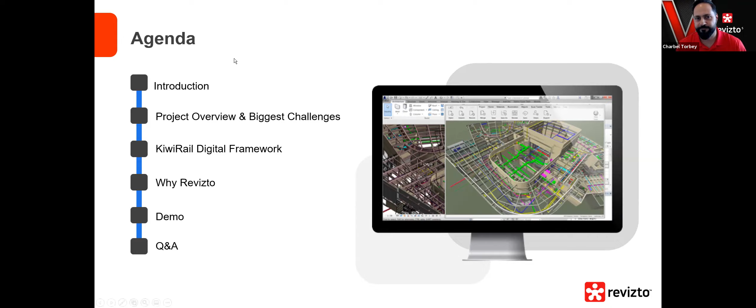I'll just do the obligatory awkward transfer from one slideshow to another, and maybe caveat this that there's probably a number of you working from home at the moment in various degrees of lockdowns and what have you. So it wouldn't be an online presentation unless a toddler or a small child interrupts. So if you just want to place your bets in the chat, Derek's got a toddler that's always keen to help, and I've got a 4-year-old that's pretty intent on chipping in her 2 cents on why we use Revizto. So you can look forward to that later in the proceedings.

So yeah, Charbel mentioned a little bit about KiwiRail. We're New Zealand's rail operator. We have just over 4,000 kilometers of track, and there's a few different parts of our business. So we have a freight business that includes moving freight right through the North and South Islands, and also that connection between the two through our Interislander business, so the 3 ferries that we operate across the Cook Strait. We're responsible for the infrastructure that those services run on, and we have a pretty large property holding as well.

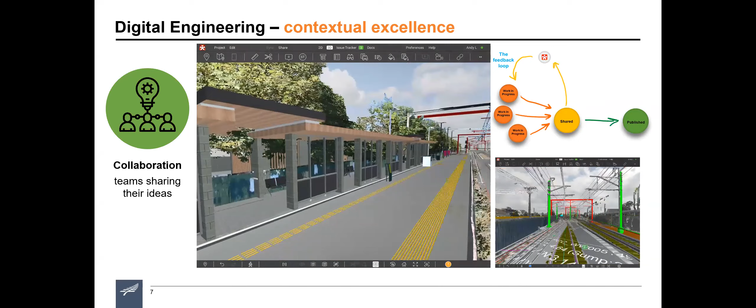So, slide here. One of the big things we see as an opportunity when it comes to the design phase of a lot of these projects is around what was at the top, contextual excellence. I'm sure there's some people on the webinar that have already heard me say this, but it's not uncommon for us to take a look at our codes and standards, or to take the building code. What we really have there is a list of do-minimums, and we quite often articulate what we want in terms of the do-minimum. And so that's what we get. We don't really discern between somebody who's done the minimum and someone who's gone well above and beyond it.

But good isn't just a pass or fail. There's good and there's great. And I think one of the things that can be a real challenge for us is how do we understand, once you've met the minimum requirements, what's better than just doing that?

So the example I give is, come home from school, or would have if we weren't in lockdown, and the kids will go in the front door and they'll dump their bags and jackets and shoes all in the middle of the hallway, which I'm sure you'll be shocked to hear. And obviously my wife and I will politely ask them to put their crap away in their room, and they'll sort of begrudgingly drag it off down the hallway.

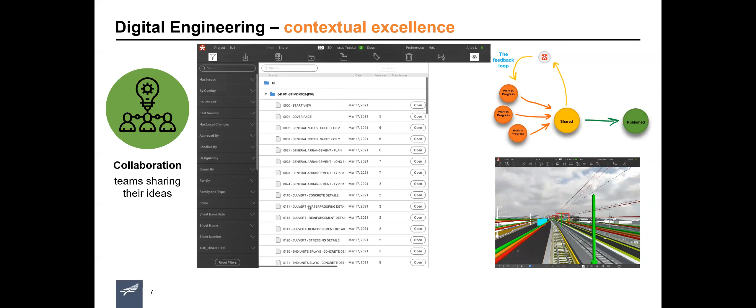And a few moments later you hear a thud, and it'll be our 4-year-old or the dog's tripped over and face planted because there's a large pile of jackets and bags and shoes and things lying just down the other end of the hallway. And so when challenging the 8 and 10-year-olds on why their crap is still lying around in the hallway, it's great when they point out that it's actually just inside the door. So technically it is inside their room, which is what we asked them to do.

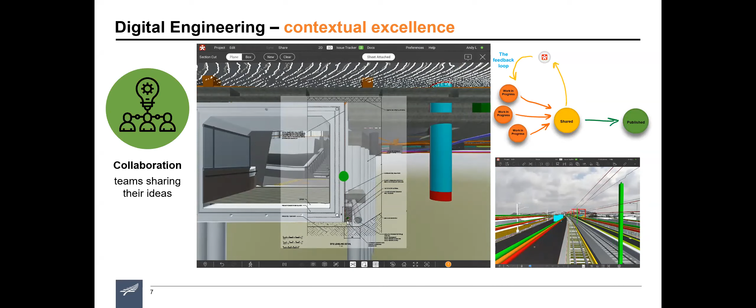They've met the minimum requirements, but I'd say it's far from contextually excellent. Okay, you did what I said, but that wasn't really what I meant, and it's a long way from looking good. So for us, Revizto is one of the tools that we can really use to bring that contextual excellence into the design phase, federating lots of different types of data together.

And yep, we've tried to use things like Navisworks for that previously, but it's unlocking it in a way that's really simple and easy for everybody in the project to use, so that it isn't just the technical people that are authoring the information that are able to access it and consume it. It's everybody on the project, and they can see what it looks like next to everything else that's happening. And that contextual excellence, what's the expression, daylight being the best sanitizer.

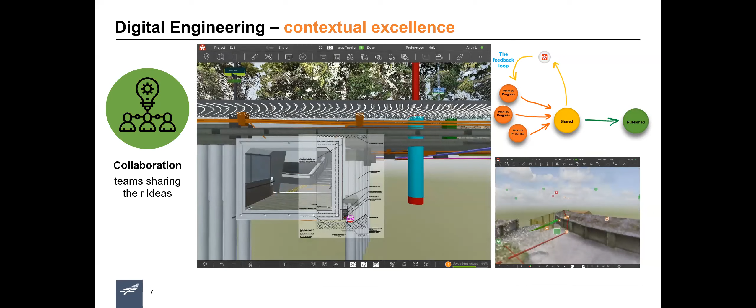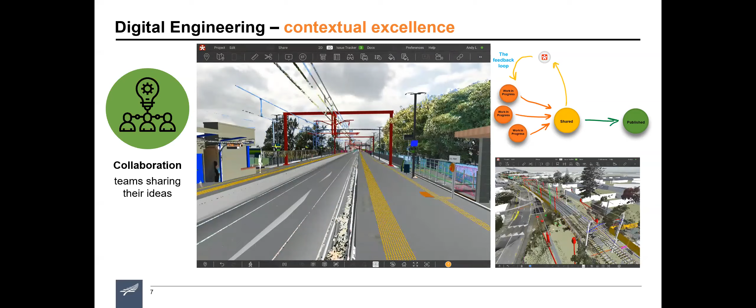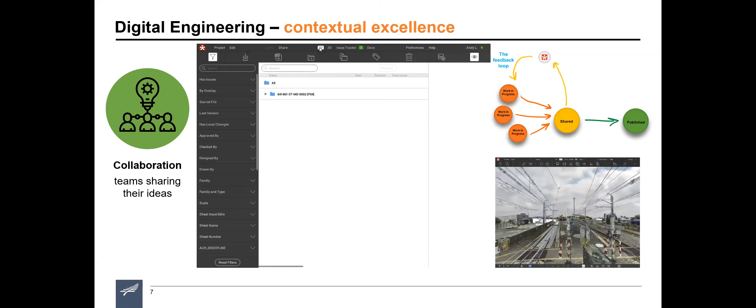Once you see these issues out in the open, people become very aware of them, and they tend to get cleaned up, and they get cleaned up in advance of us getting out to site and discovering those issues. I think that's probably one of the big lessons we learned from our first pilot project, which is actually on the screen at the minute. We didn't have Revizto on that project, and we were using Navisworks to federate everything and work through the coordination and clash piece.

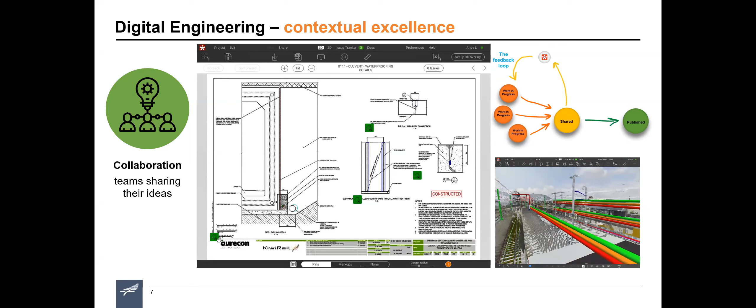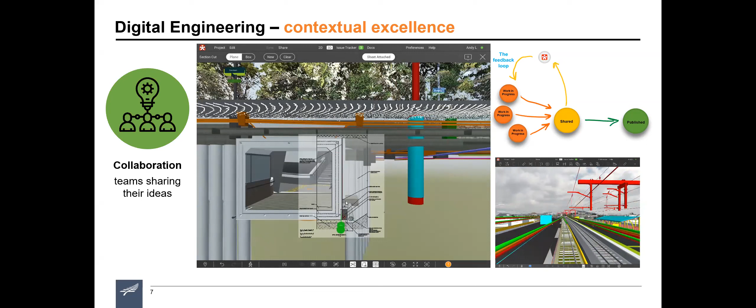But what we weren't doing a very good job of was actually closing issues out as they arose. We just didn't have enough rigor around it. So we were still having instances of getting to site, finding a clash, checking the model, and the clash is in the model. So it was great that the model represented what was happening on site. It was just a bit of a shame that maybe we had left those clashes baked in.

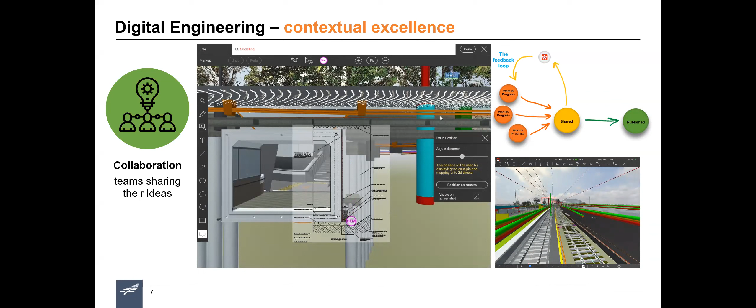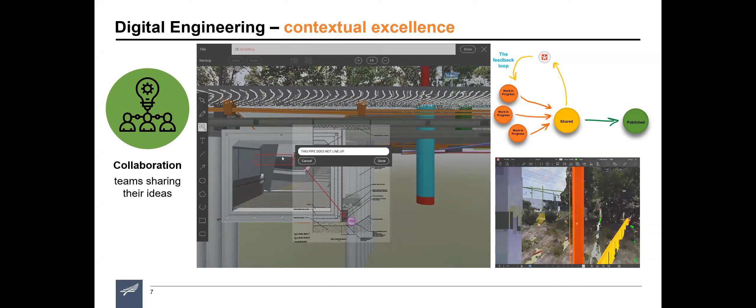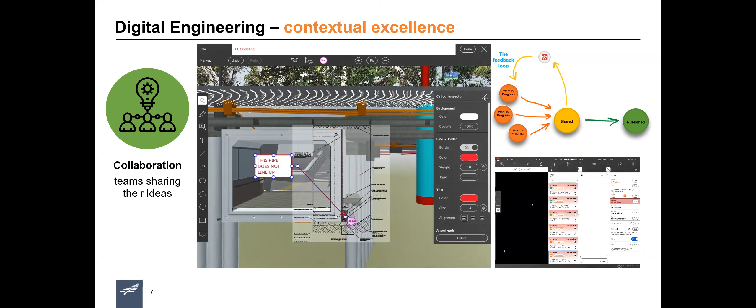And so on our second pilot project, we decided that was something we wanted to address. We wanted a tool that was going to give us a way to raise those issues, but actually track them, close them out, and make sure that we were resolving things before we got to site. I mentioned our CDE. We kind of thought that everything will be in there and everybody will go there to consume it. But actually what's now transpired is Revizto's become the place where people come together to collaborate.

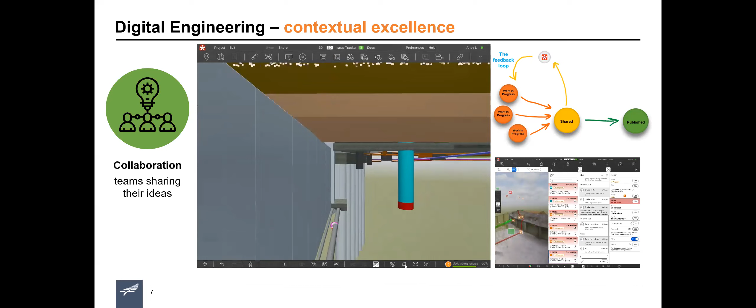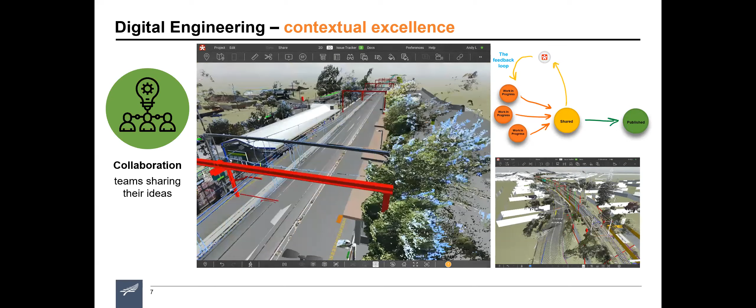The information does live in our common data environment, but ultimately it's a fancy document management system. And it's the power of having all of this information in one place and creating that contextual excellence that everybody in the project team can go to, that really is adding value to our projects.

Awesome, Andy. I had two questions around the same things that you already mentioned. I was going to ask about your strategy in terms of implementing and using Revizto, and I think you mentioned it briefly, but from our previous presentation, I heard you saying before that you provide licenses to everyone on the project. You pay for these licenses as well. Do you regard this as a cost, and why is it important for you that everyone has a license? Yeah, it is. So that's the approach we take.

We recognize that a lot of the issues, risks, and problems that kick up on our projects, whether we've transferred some portion of risk to the supply chain because they've been contracted in to hold that and address it, they're still our projects. And when problems come up, it still affects us. It's our network, it's the disruption to our customers that we're trying to avoid. So it's in our best interest to iron those things out.

And when we look at the cost of buying a license and supplying it to anybody that's involved, what we want is the teams to coordinate with each other. We want people to collaborate. We want them to do what's best for the project. There's enough barriers to changing the way people work without adding an extra commercial one around the cost of a license. So the approach we've taken is we'll buy the licenses and we'll provide them to anybody on our projects, because we need you to be working together on this.

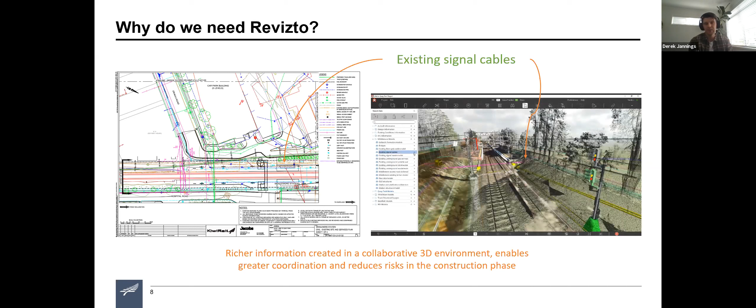We also have a lot of our work that has to take place at night, just because of the kind of disruption. So to go from a process which was maybe go out to site, do some potholing, take some photographs, get home and sleep, and then wake up and then write it up and then send it on to somebody. And it can be a couple of days before that information hits the design team that need to coordinate it. With Revizto, the team can just take the iPad out into the field, take the photo, tag it, and when the design team come in the morning, it's sitting there ready for them. So it just speeds that process up considerably.

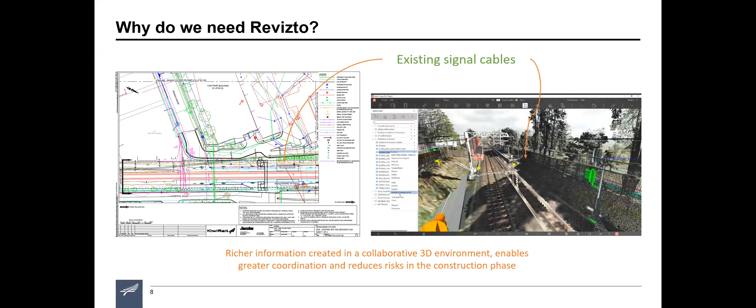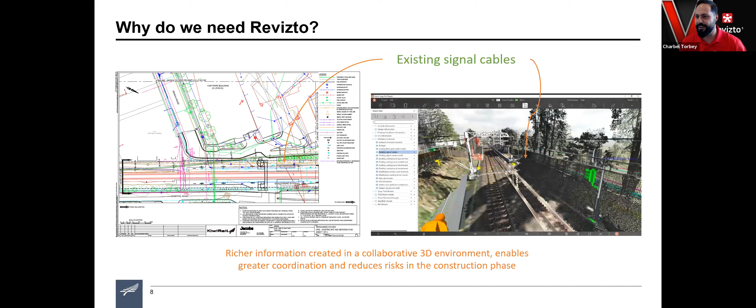That's awesome. I think I will have more questions toward the end, but I'm very excited to see the demo that you told us about when we were preparing. So if you could take us through the demo, maybe Derek will do it, and then we'll see if people will ask some more questions. Then I'm sure they will.

Yep, sure. It's fair to say we drew straws and Derek drew the short straw, having to do a live demonstration, which I don't envy you. Love live demonstrations. My hands aren't sweating at all. Right, let's do this. Can everyone see that? Yep.

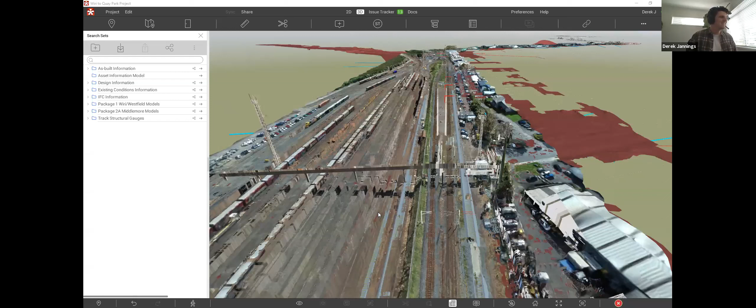Cool. Okay. So this is the project I mentioned earlier, Wiri to Quay Park, and the things I'm going to show in the demo aren't necessarily super complex, but they really show the value of what having a collaboration environment does for our business and for our projects. And one thing I wanted to say was that Wiri to Quay Park was one of the first projects to kind of adopt this at scale, so I'm not taking the credit for this, because that team has done really awesome, showing initiative and taking this tool and really embracing the value it can add to the project.

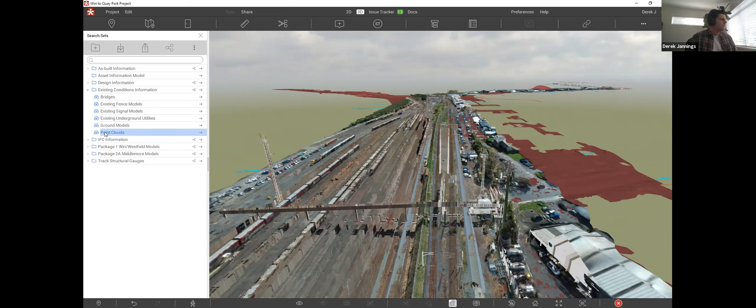So what you can see in front of you is Westfield Yard, and what we've got in here is monthly drone point cloud footage. So of course this is a live environment, and we have to do construction when we can get access to the network. So the main contractor Downer takes a monthly drone scan and we feed that back into Revizto. And for us, that's really valuable because it just gives us that context. So what I'm going to do is just hide that and hide the ground model. And then you can start to see all of the design information and what's going on.

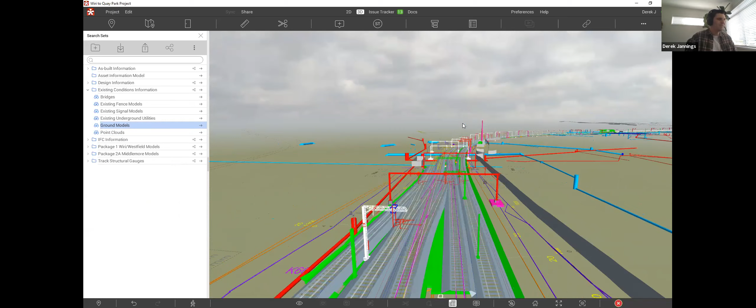But when you see it without the point clouds, you see there's a lot to do, but you probably just don't have that context of how it fits in to what we have on site and what we have to coordinate with. So I think for us, being able to bring that live environment back into this environment and everyone having access to it is just really powerful. It just really enables us to have an understanding of what we're building, what we're designing, how it has to work in what we're doing.

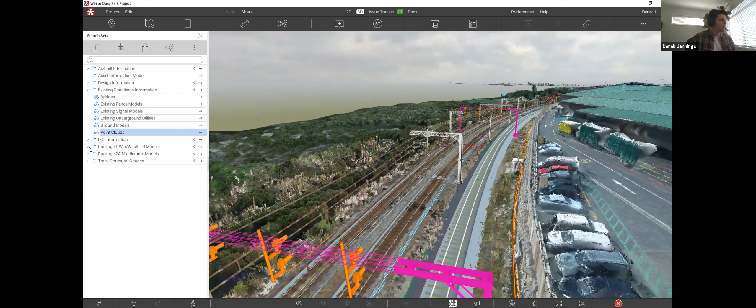And so from that, we've really embraced search sets. There are a lot of models. There's probably over about 100 different models on this project. The project's broken down into 5 kind of sub-projects. And so by using the search sets, we're really able to filter that information and just make it accessible to a wider audience, and just easily turn things on and off. And so, for example, I've just isolated in transparency the OLE, so that's our overhead line structures. So you're easily able to see where they are in context of the site. Cool. Okay.

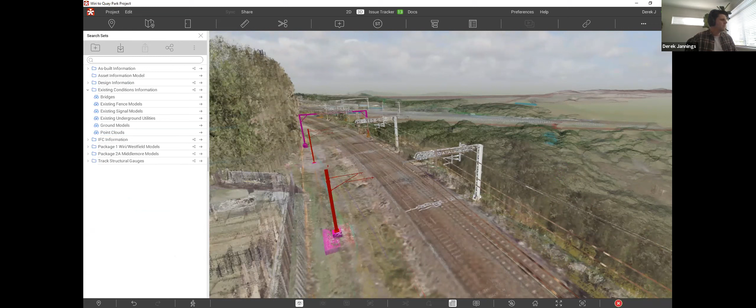So the next thing I wanted to show you. Sec. We're just going to head down. Viewpoints are really powerful for us because we do horizontal projects. Our sites are often kilometers long. And so scrolling, it's not like a building, maybe a 12-story building, where you can scroll up a few levels. It can take a while to get from one end to the other. So again, really simple use, but really powerful for us. So I'm going to go down to Wiri Junction.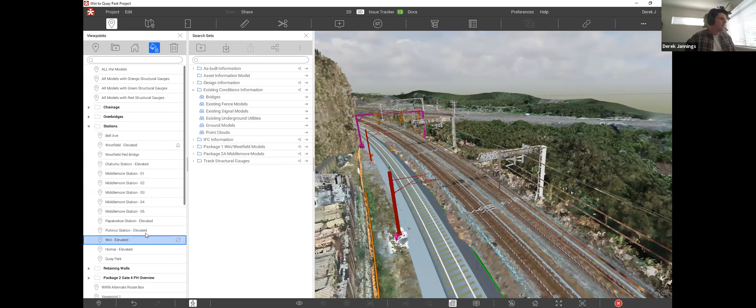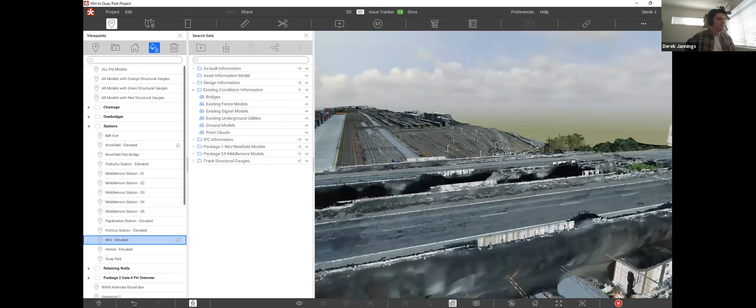And that's going to load up. Cool. So this is Wiri Junction, and this is one of the busiest junctions in New Zealand. We've got an EMU depot and a freight area, and there's a lot going on. A lot of trains have to get through this area with some tight tolerances.

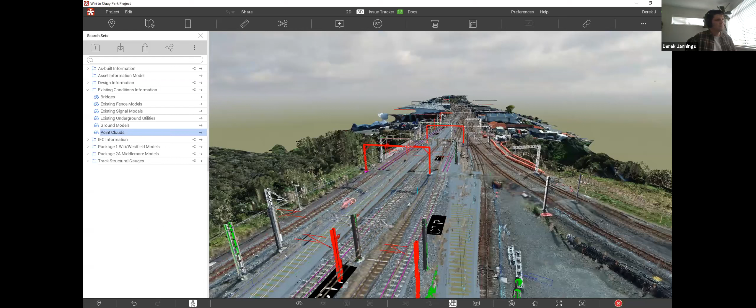One thing we've started doing is we do monthly as-built models. So every month we get a model from the contractor of what's being built, and this gets fed back into the Revizto environment. And that enables us to continue to coordinate with what's being built. So to just give you a bit of context of that, just going to hide the point clouds. So we've got a whole bunch of models.

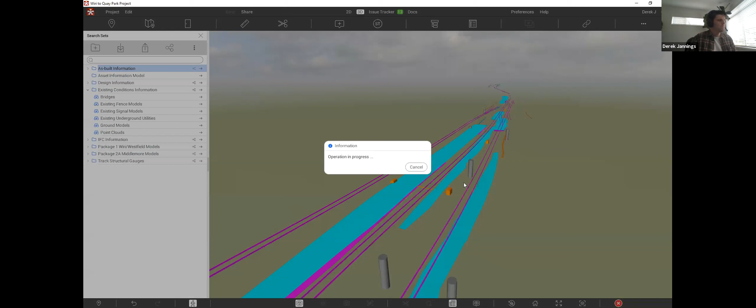I'm just going to show you. So this is the as-built model. So this is what's being built to date at the site. And you can see that it's pretty powerful once we turn back on the design models, that we're able to coordinate with that.

So, for example, we've got these foundations here. The foundations have been built, but the overhead structure hasn't yet. And we're able to feed that back in and continue to coordinate in a way that's efficient and that we have never done before. So yeah, quite powerful.

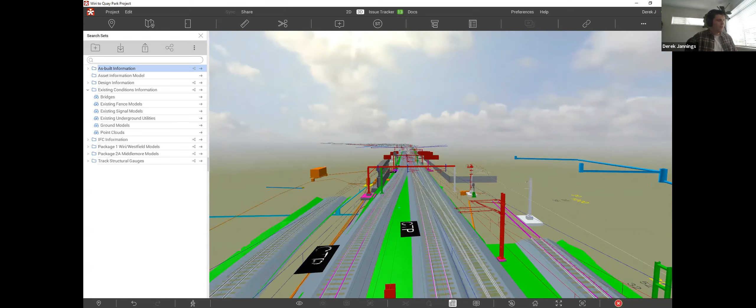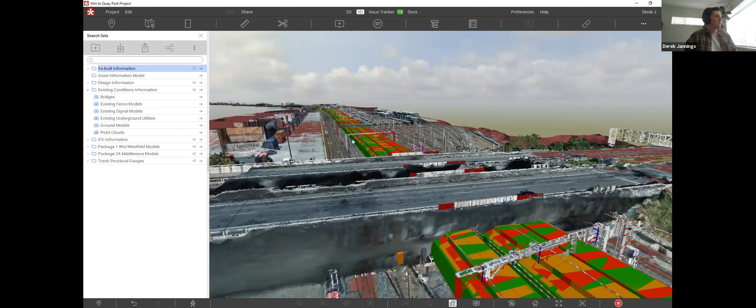And then the final thing I just wanted to show you that's quite unique to rail. So I'm just going to turn everything back on. You'll see these big box things covering over the rail corridor and wonder what the hell they are. This was a really good initiative by our track designer. And so these are structural static gauge clearances. And if there's anyone on the call from our team who wants to correct me because I don't quite get it right, please do. But essentially, these are the clearances for trains.

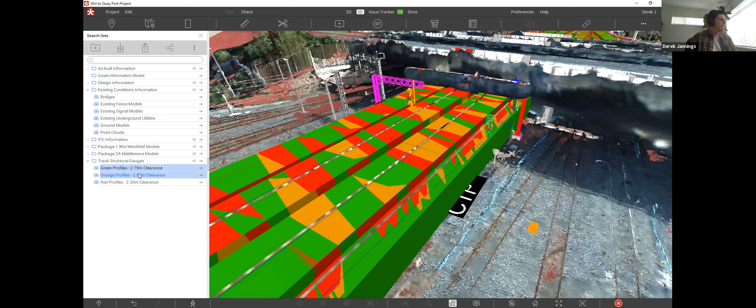And like I said before, we've got some really tight tolerances. Again, we use the search sets, but what it enables us to do is just get that next level rigor around coordination. So we've got 3 different clearances here, so you can see the different things. I'm just going to hide a couple of them so it doesn't look so busy, but some of this is existing infrastructure that we have to get rid of where we're putting new tracks, but also it gives us confidence that things we're building are going to be fine.

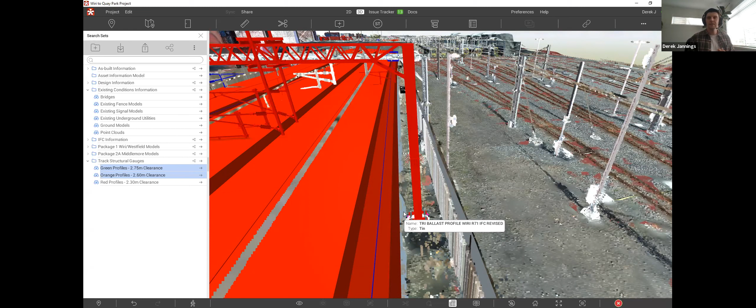So yeah, it's enabled our team to coordinate all in the one place, bring in a whole bunch of models that, you know, we have some pretty bespoke softwares that our teams use, bring that all into the one place, everyone be looking at the same stuff and coordinate in a way that we've never been able to before. So for us, collaboration environments just really unlock a lot in that space.

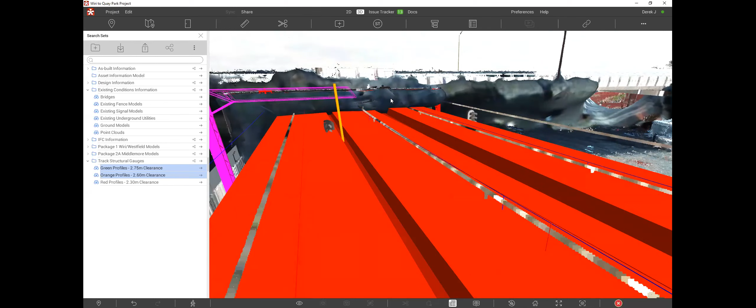It's fair to say with the project teams as well, like Derek mentioned, the structure gauges that we're looking at now. Once we put this in the hands of the smart people in the project teams, they tend to come up with other crafty ways to use it. So it is really useful. If you ever tried to have a look at assets out in the field and figure out what's happening with the structural gauge, it's just an impossible task. So to be able to stand there with Revizto on an iPad and have that discussion in a useful, meaningful way is really powerful.

We also used putting in things like sea level rises and changes. We've put those into our ferry terminal design projects to be able to get an impression for the varying scenarios we might have to contend with in that environment. So once you unlock the data, put it all in one place and let people have at it, it's a great bed for innovation to happen. And that's a huge benefit to the project.

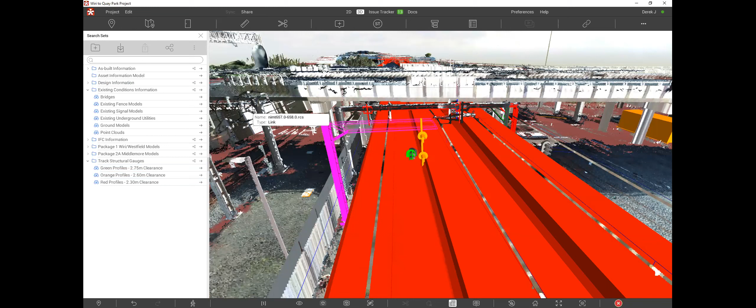This is amazing, Derek. Hi, I have a question from Ian McKinnon. He's asking, in what format is the as-built model, cloud or component? And then he said kinematic envelopes. So you go, Andy. I was going to say, okay, sorry, I thought you said the kinematic envelopes.

The as-built models come in a range of different types. We look for native file formats and often take a federated model as well. We quite comfortably take LAS files and point clouds and things, the drone imagery. I'm not sure what that's coming through on, Derek. Yes, so we've got LAZ, RCS, but the meshes are OBJs. Yep. And I think we're pretty happy to work with whatever native file formats we can get our hands on.

Yes, we generally say if it's something curly, we might look for an exchange format as well. So we might be looking for an IFC or something along those lines, or DGNs or DWGs. It kind of just depends on the specifics. But we have a range of Autodesk and Bentley products being used to author things. So we've got to be able to cope with quite a few different types of authoring softwares. Yeah.

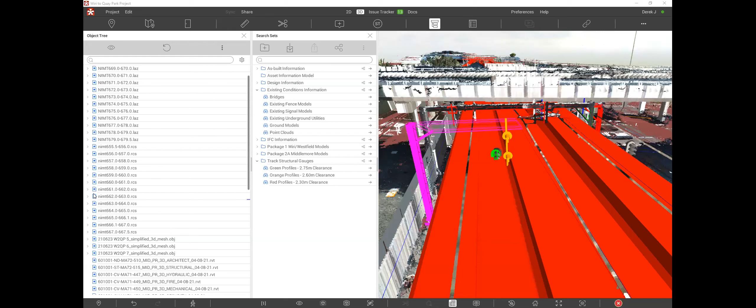But they're more around, I would say, we've got 2.75 for the face of traction poles as the offset that we look for. But in certain circumstances, you can go down to, let's say, 2.3 meters for very isolated obstructions. And so it's an easy check of those things. Yes, still got a way to go before we can get those dynamic envelopes in. And that's where you can see the difference in the different clearance options.

Got a few more questions, and we still have minutes. So we'll try to see what we can. So Kevin, first we have, Nathan, are there any graphical assets specified for the model elements? If yes, what are they and how do you audit it? That was one.

Say again. Are there any graphical assets specified for the model elements? Okay. I'm assuming you mean our standards and how we want the graphical elements to be modeled? I wouldn't say we have a particularly strong set of requirements in how we want geometry provided to us at this point.

So one of the things we are working on, and you touched on it in the introduction, is that what we're doing is more than just delivering for the projects. It is opportunities to transform the way our business works. And so we have a project as part of that, which is around model elements and libraries. We want to get to a point through these projects where we take the good examples and go, actually, that is what our assets should look like. And we're going to use that as our model library from now on, so we can supply that out.